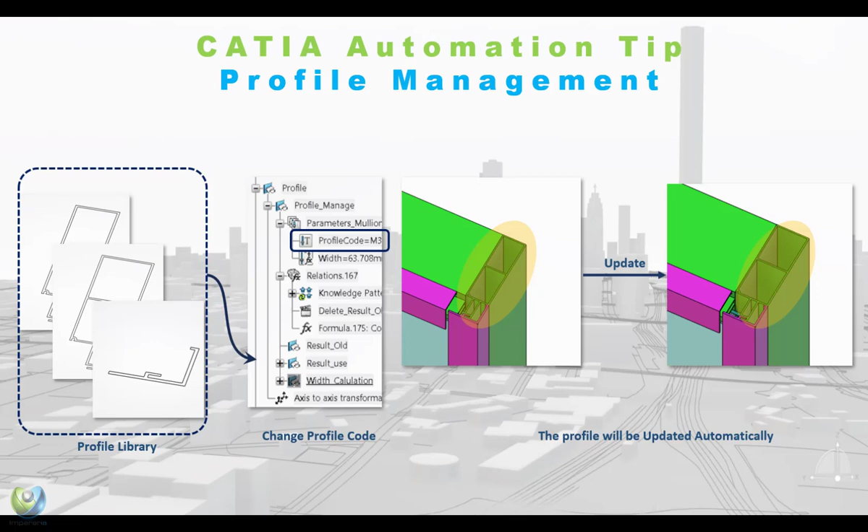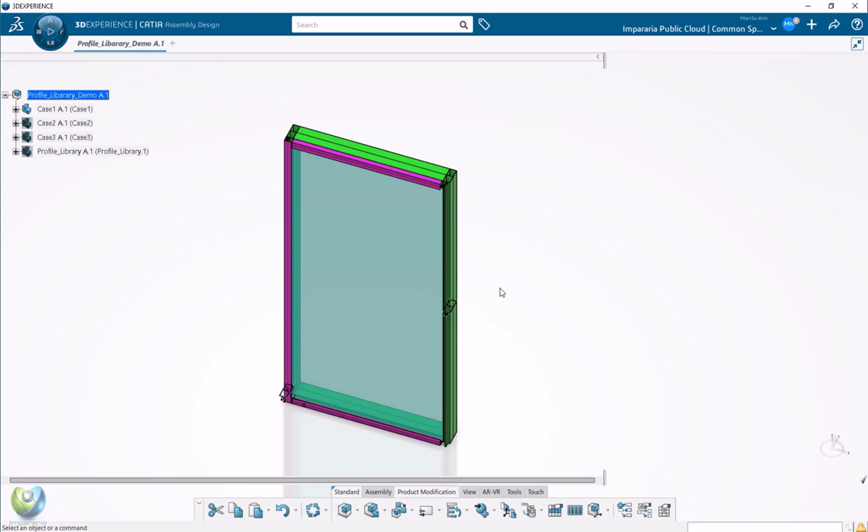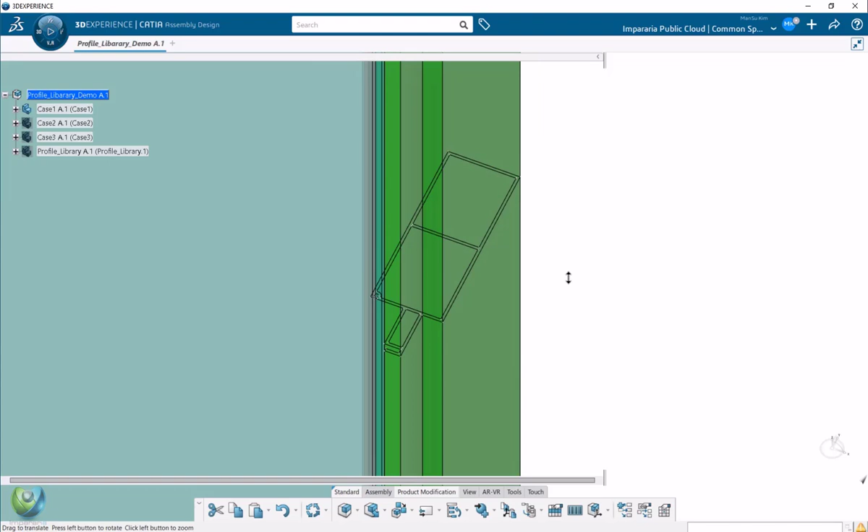Today's content is about profile management. Imagine you have a template that will be instantiated at the project level. After you instantiate it, if you want to change the parameter—profiles that weren't expected while creating the template, but later you need a new profile and want to change it—there are several approaches to achieve this. Let's go from the simple one step by step to become an expert.

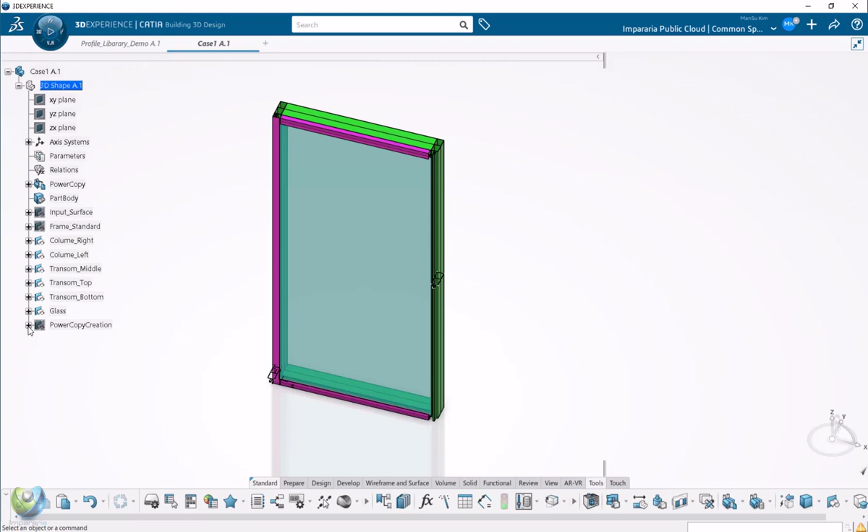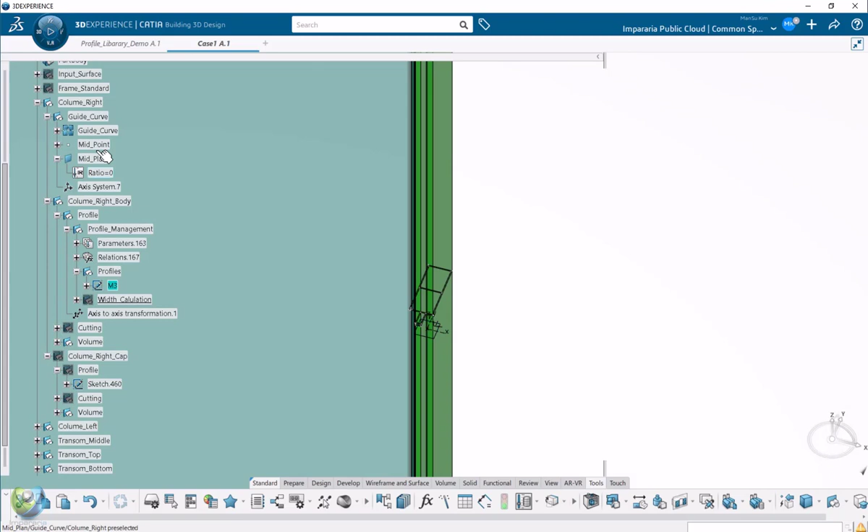The case I prepared is about the manual work, to see the challenges. Here we have a template, and let's say you want to change these profiles. Let's look at where the profiles are. We need to know the place here for creating the mullion in this case. We have a plane for the profile sketch, and a point of the frame located where this profile is, which helps support the sketch and gives the axis system location of this profile.

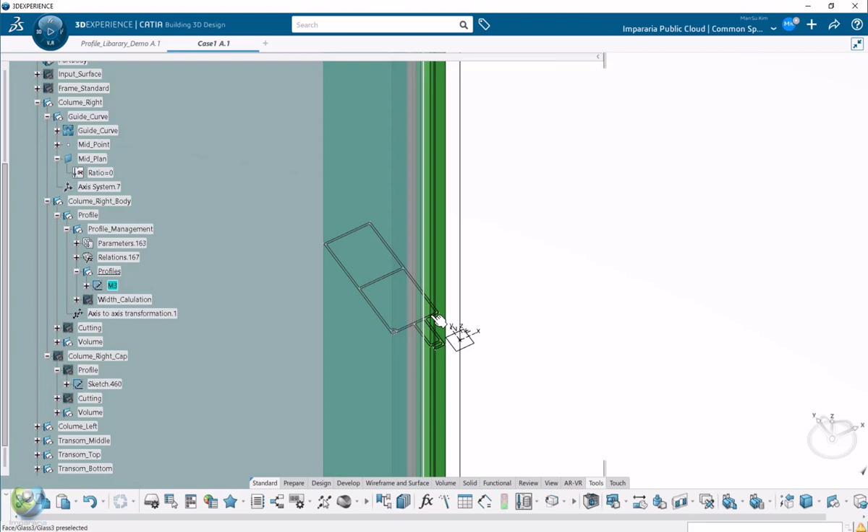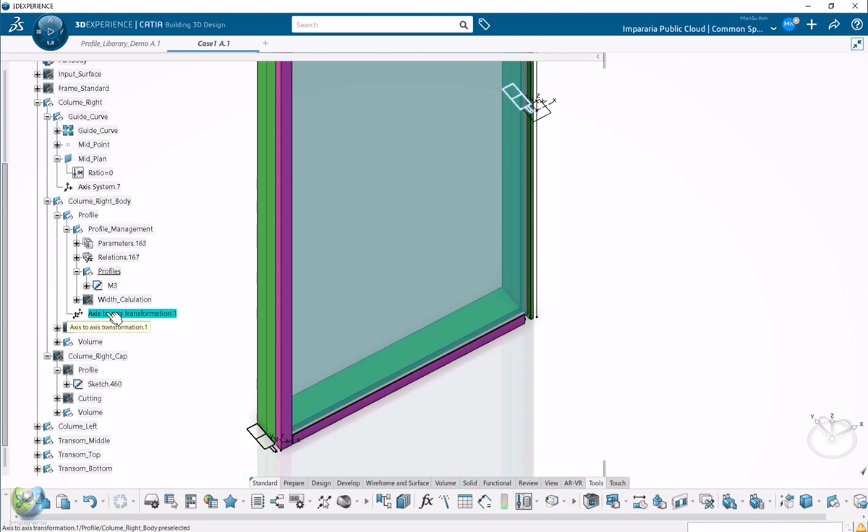So we'll have the profile here. You can create the profile directly here, but I recommend creating it in the original axis system of your part file. Then next time you need to switch the sketch, you can import from AutoCAD or from the profile library, without worrying about the plane and point input to instantiate here. Instead, we have the profile from origin, and use the Axis-to-Axis function to move the geometry from here to here, then use this profile for the volume.

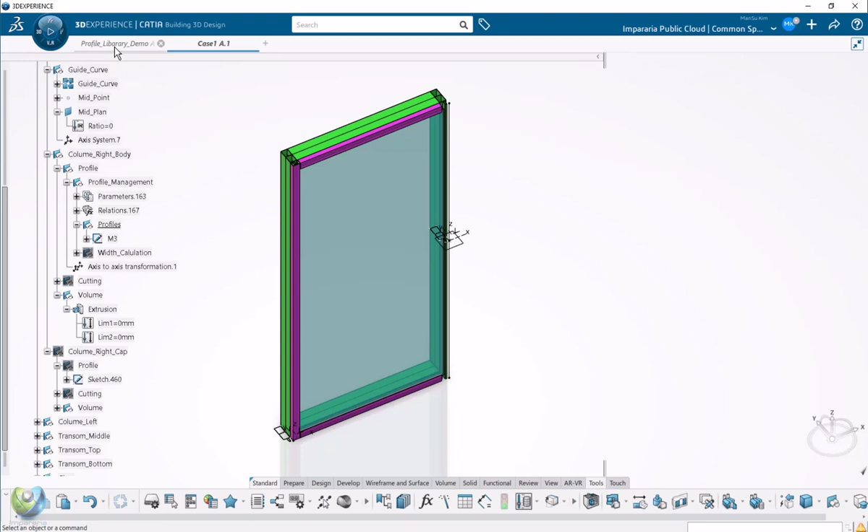This way, it's easier later to change your profile. The first step, if you want to change the profile, let's try getting another profile from another place. Here's a profile library I prepared. Let's bring the M2 profile, copy it, and paste it here. You can copy and paste from another library because they don't have inputs—the input is only the XY plane, which always exists in any 3D shape—so without error you can just bring it here.

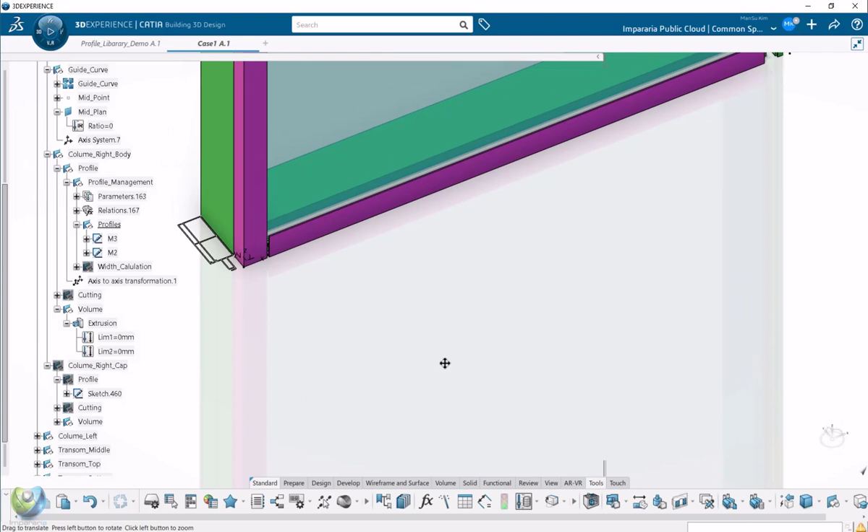Now you can just replace from here, replacing M3 with M2. What happened here? It seems already changed, a little smaller. Let me go back with Control Z so you can see what changed. This was our original one, and when you change the sketch...

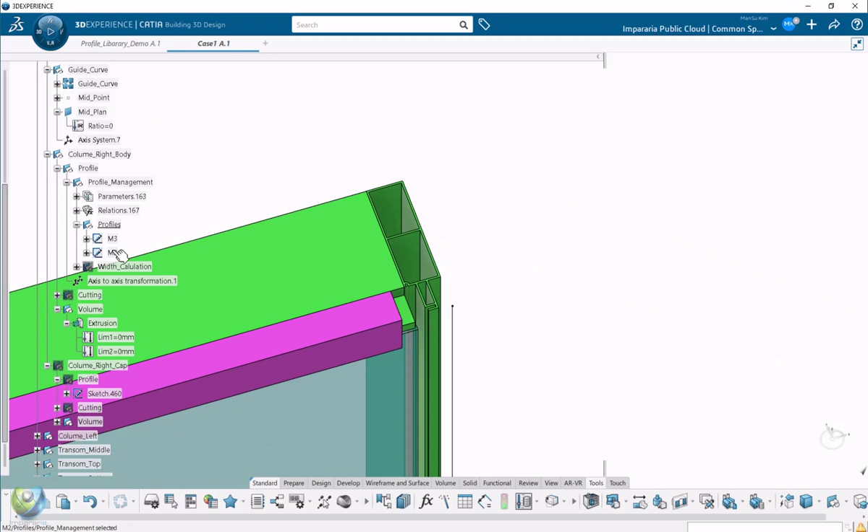Again I'll try changing here from here to here, and this will update the profile. Then according to the profile, you'll check where it should stop or similar things. But the issue is how you manage this kind of behavior—you don't want to create the sketch and copy paste each time, because once instantiated, it becomes manual work whenever you need to fix it.

Let's look at another case, to see how we can improve this methodology. Here's case 2. Let's look at the same place—column, right body, and the profile. This time we have a profile library here.

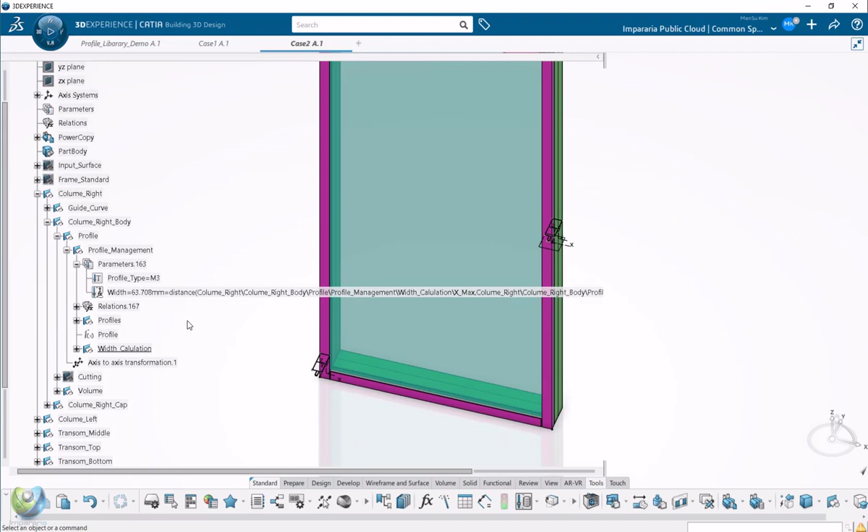I prepared a string here, and this string looks under the profile geometrical set, finding the same name as the profile. By this rule, the profile is selected by these strings, not directly. The sketch is brought into the axis system.

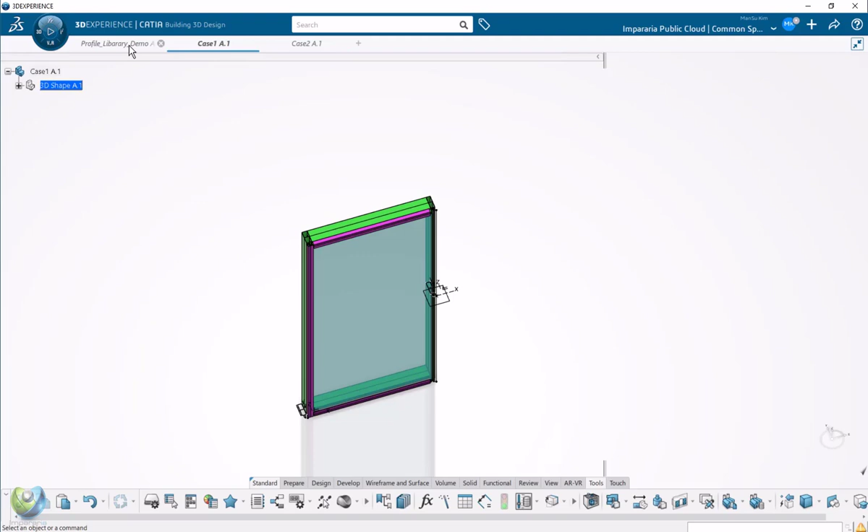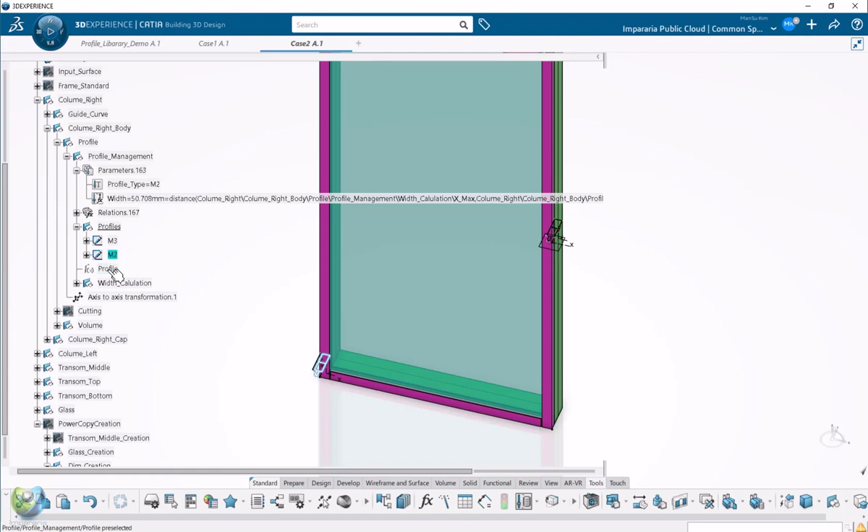So here this was made, and if you want to add more profile here, let's copy again from the library. Control C, come back to case 2, and Control V. Now instead of replacing, we just select and put it here as a name. This string will look at this sketch, and this sketch will be the final profile, which moves to here, and this works for the volume.

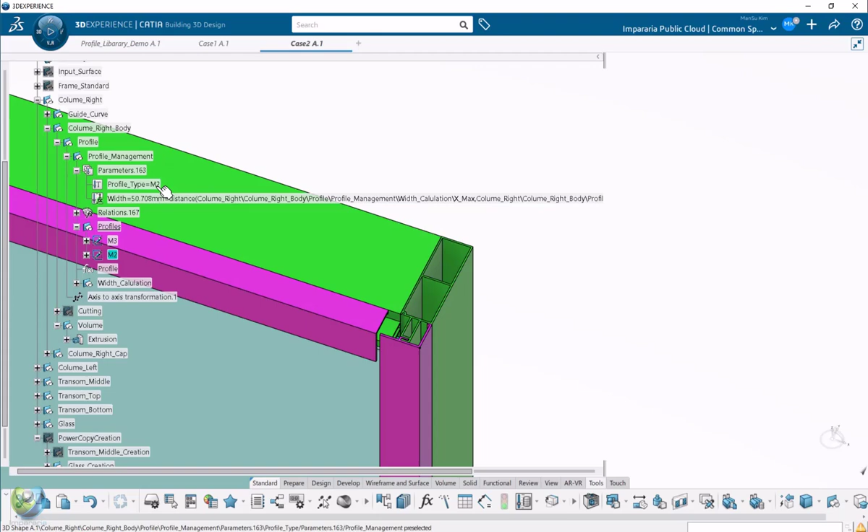So that's how you can change it. But there are two steps—you need to place it, and you need to modify the string. Let's look at another case.

We have case 3 prepared. In case 3, we're going to copy it by script, directly from the profile library. The profile library is a 3D part—since it's just geometry, you cannot bring each geometry into a catalog. So this is just one file of the 3D part, but under it you create some geometrical sets to configure the profiles.

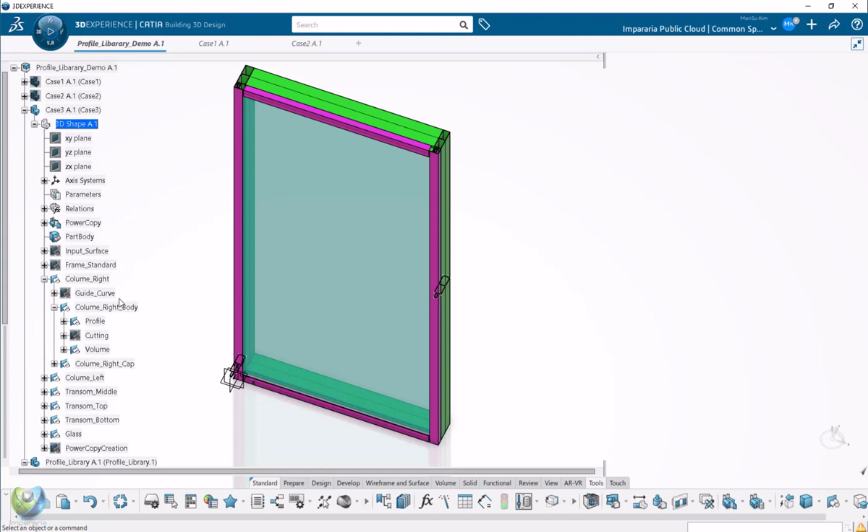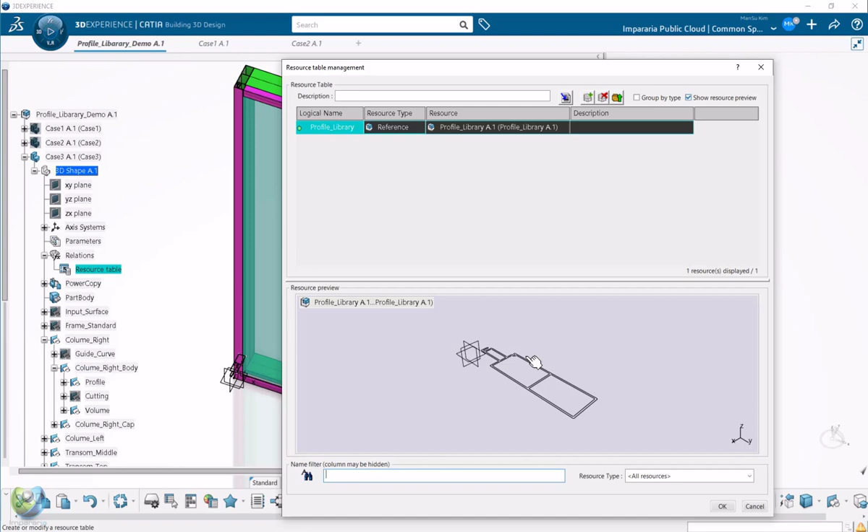From case 3, you can access this profile library through the resource table, registering that 3D part as a VPM reference. Then you can use the logical name 'profile library' in your script. From here you can access this reference and find the profile you need to change.

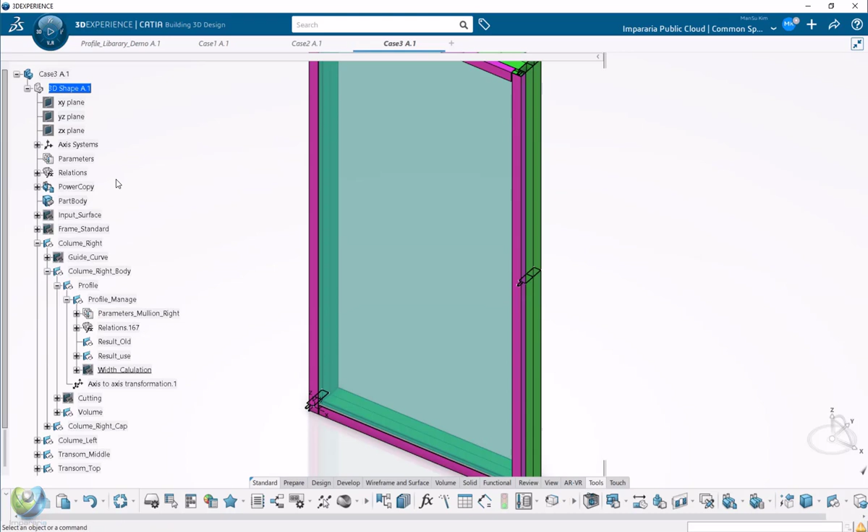I'll open it independently and look inside. Here we have the profile—this structure is a bit different from the other cases. We have strings, and I have several automated scripts to recreate the output, which will always update.

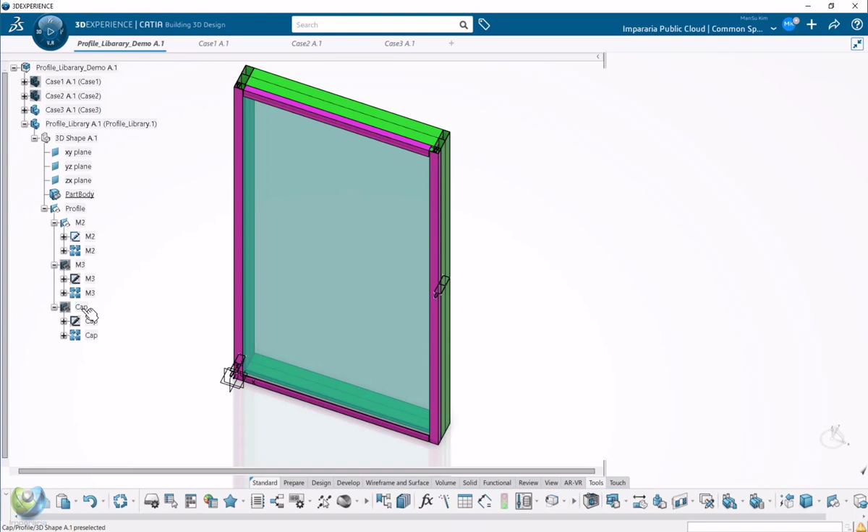Even without copying the profile, if the profile already exists in your library—for example like M2 or cap—let's try. We already have M2, so let's try M3.

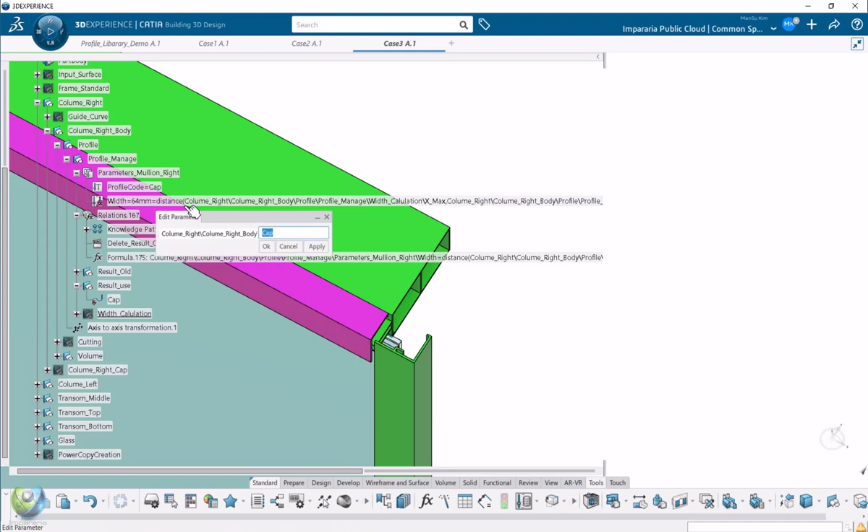When you just change the string to M2, this will update. Or let's try changing to the cap profile—this will become a cap. Since cap already exists, it's just overlapping. Actually cap is this one, so I'll hide it—you can see the green one was here. I'll change it again to M3. Okay, that's how it works.

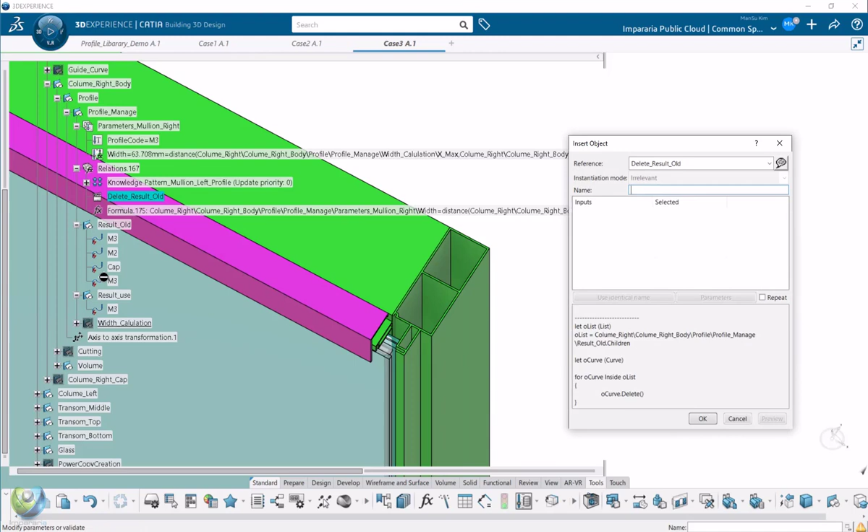Not only can you change the profile, but some scripts keep the previous profile stored here, so anytime you can come back and replace the previous profile if you wish. There's another script if you've made too many changes and think it's unnecessary—run this one to make it empty again. The key point is this profile connects here, and it will always update along with the volume.